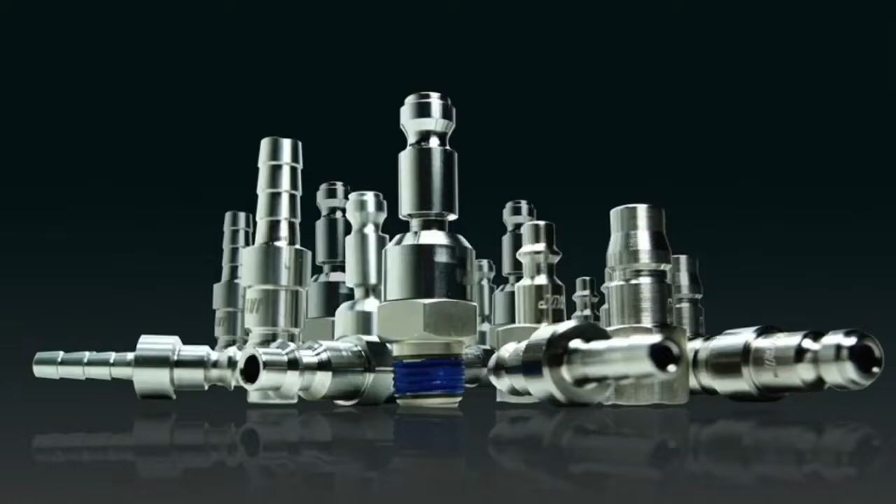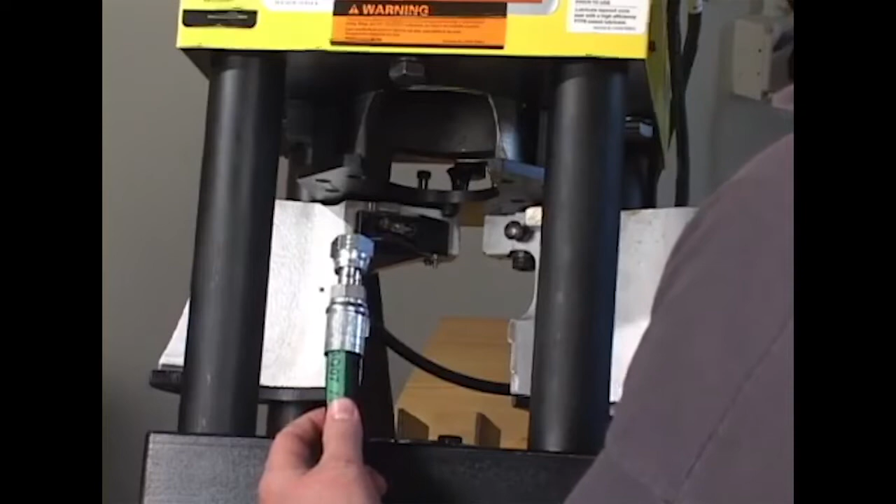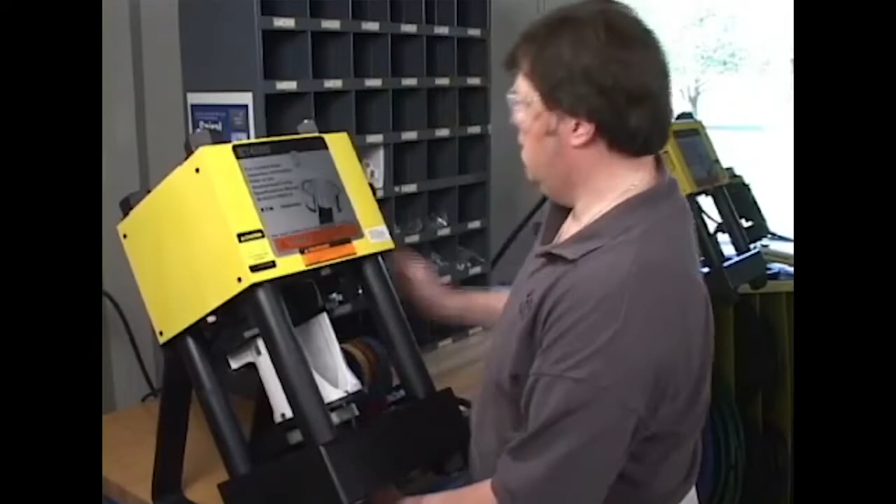Congratulations on the purchase of your new Coll-O-Crimp system, designed to assemble high-quality Eaton Weatherhead hose and hose ends. In the field or in the shop, Coll-O-Crimp systems save time, labor, and money. Eaton Weatherhead hose assemblies made with Coll-O-Crimp feature high-quality connections, ease of operation, faster assembly time, and low maintenance. You can make your own OEM quality custom hose assemblies with a Coll-O-Crimp system at a fraction of the cost.

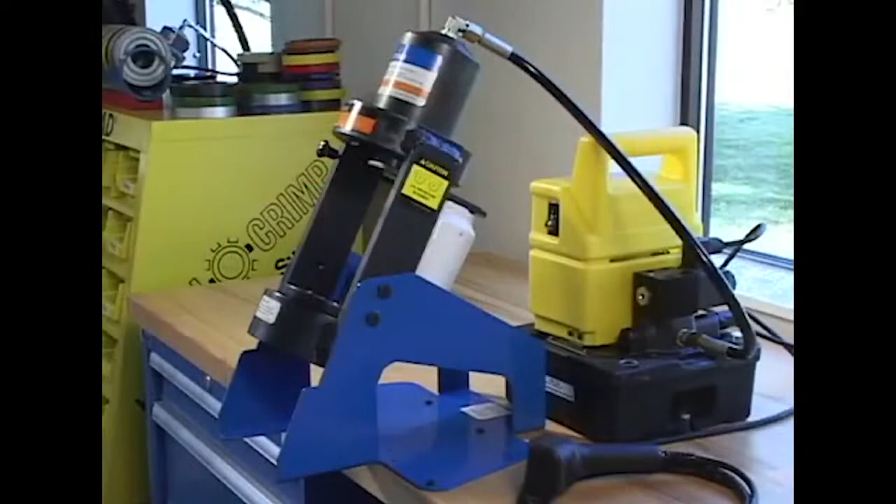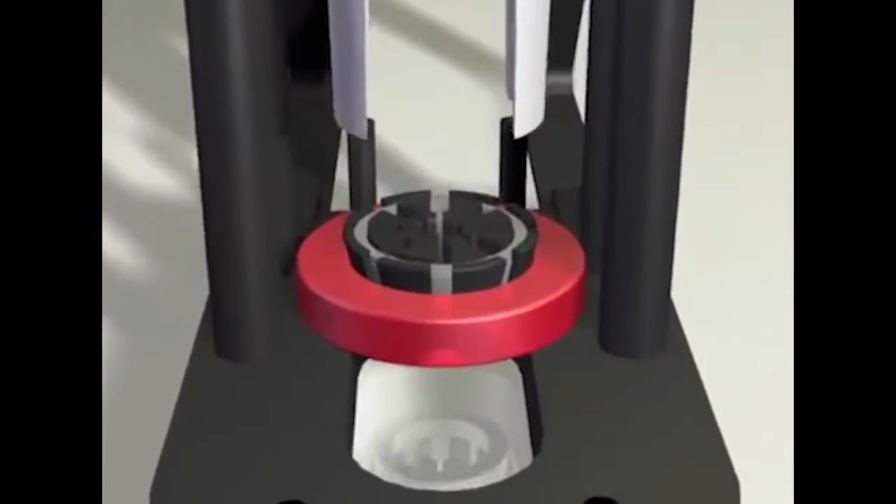There are a number of Coll-O-Crimp models, and although there are some minor differences, they are essentially similar in design and operation. There are both stationary models and portable units. Let's begin with an overview of the machines and the components they all have in common. Each machine has a base plate, a platform at the bottom of the unit that holds the die ring. On some models, the die ring is incorporated into the base plate. On other units, the die ring rests on top of the base plate.

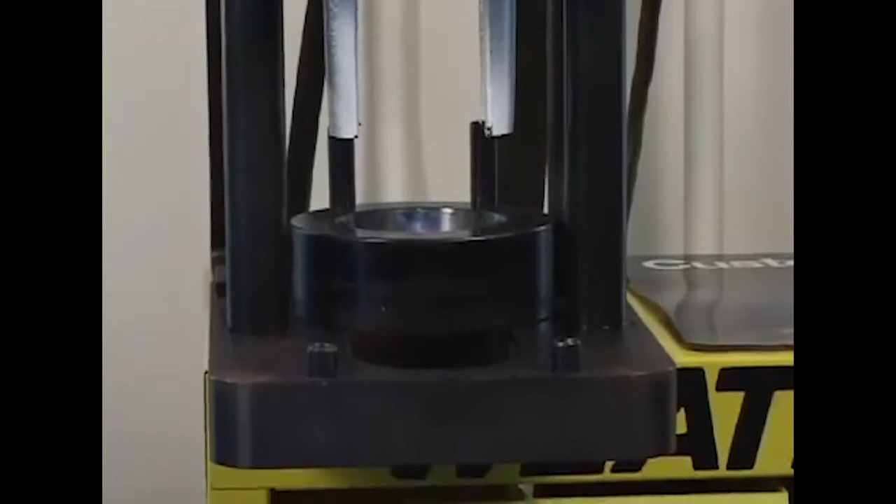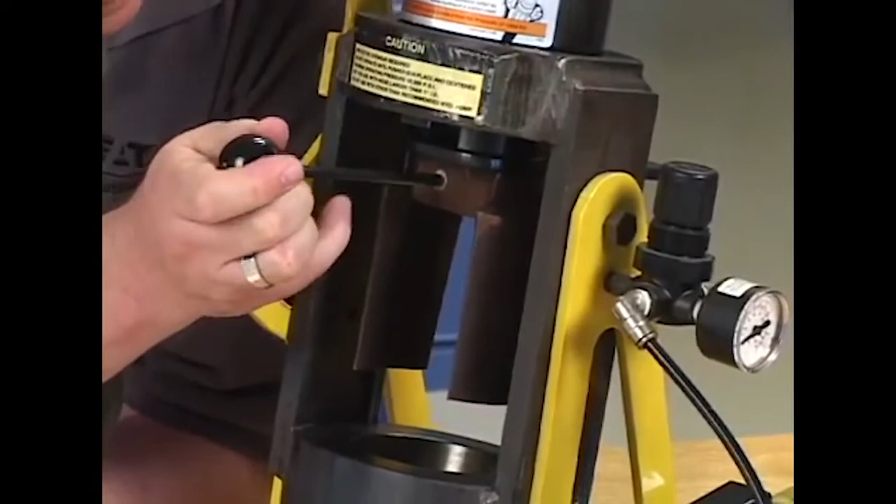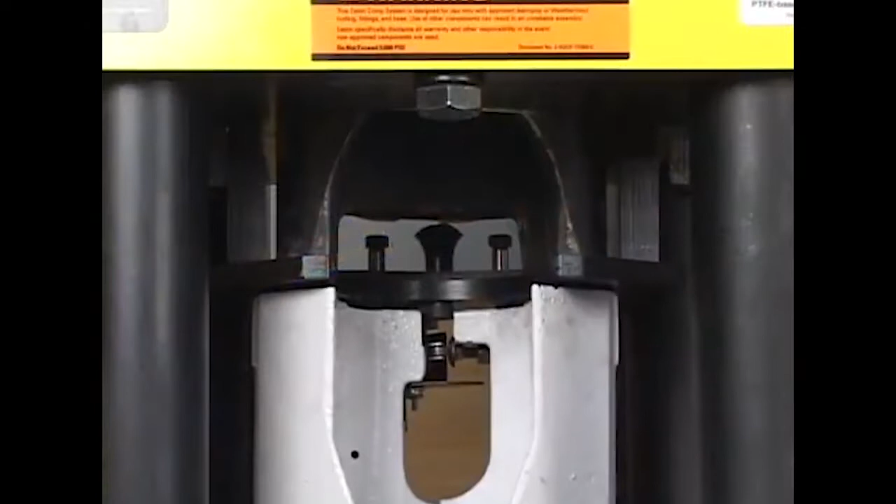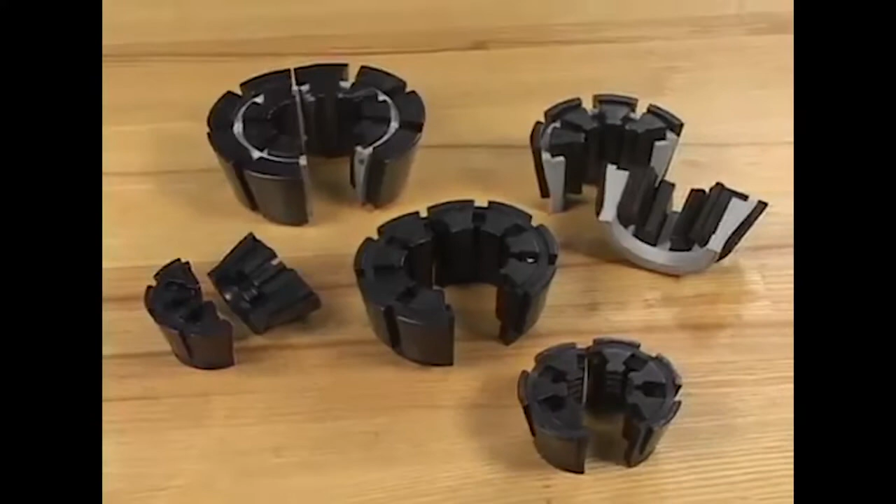Above the base plate is the pusher that is attached to the cylinder. The pusher on certain models is designed to slide for easy tooling access. Although the pushers on some models open and close and on other models are fixed, they all perform the same operation. The pusher is bolted to a piston inside the cylinder that provides the force necessary to perform the crimp. There's a series of collets that permit the crimping of a wide variety of hose types. They are inserted into the die ring and must be matched to the hose and hose end type being crimped.

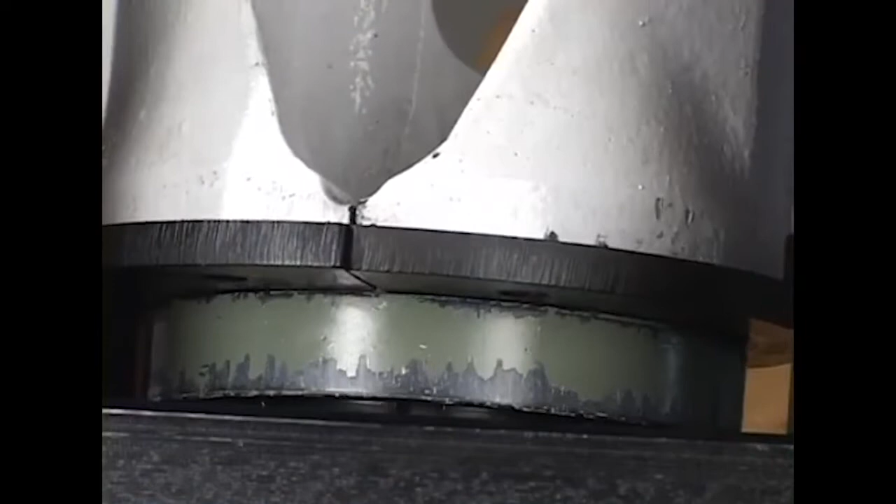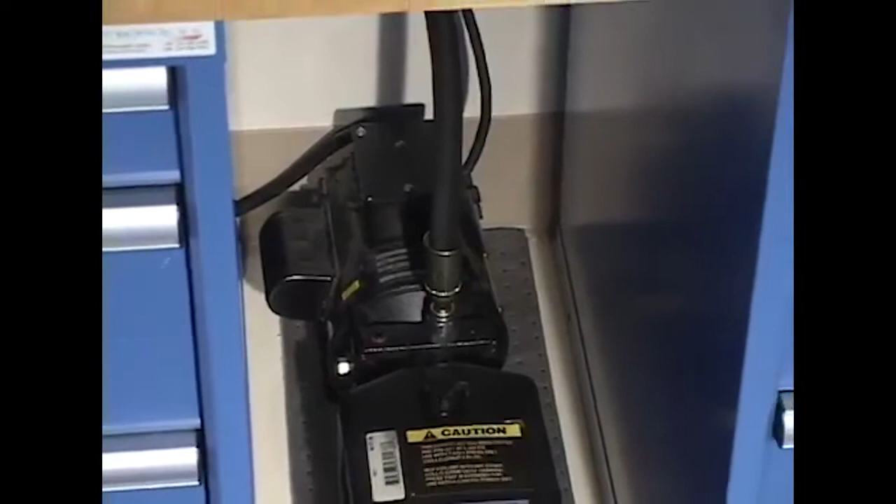All Coll-O-Crimp models provide a positive stop action that ensures a quality crimp time after time, assuming the correct tooling and hose ends have been selected for crimping Weatherhead hose and hose ends. Most stationary Coll-O-Crimp models use an electrically operated hydraulic pump that powers the press. These are single-phase 110-volt pumps that must be used with a 15-amp breaker. Optional 220-volt pumps require a 30-amp dedicated circuit and cannot be used with an extension cord.

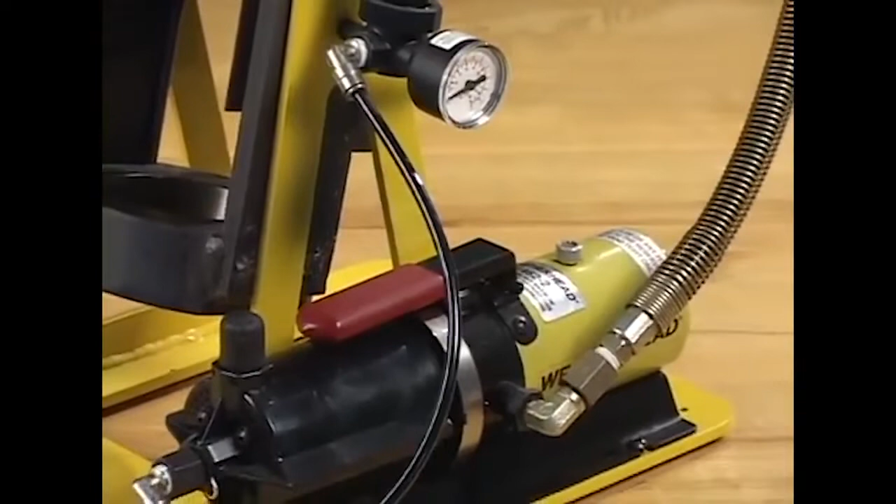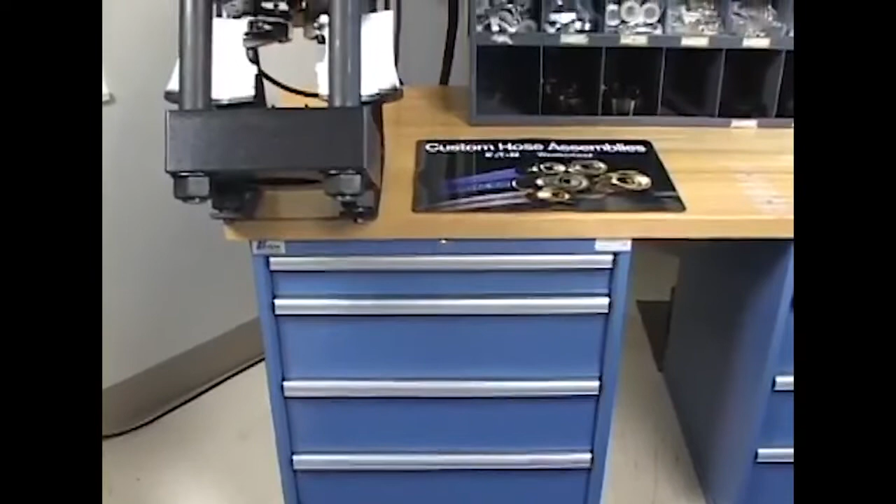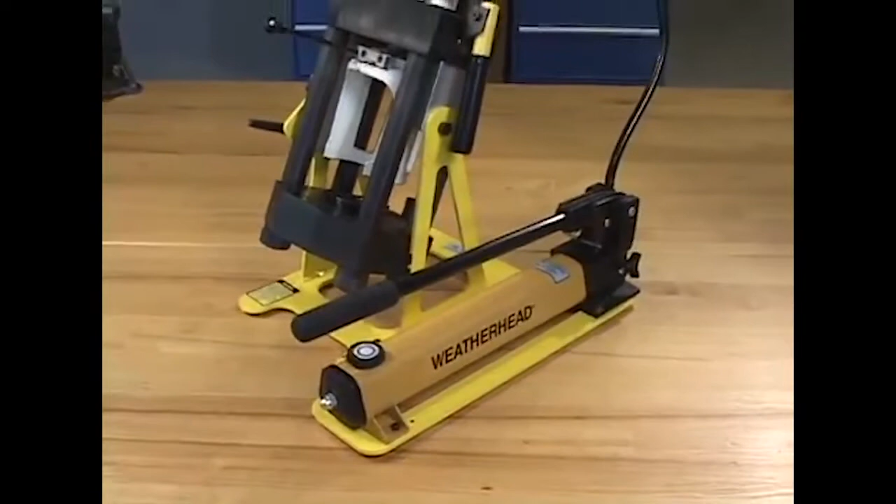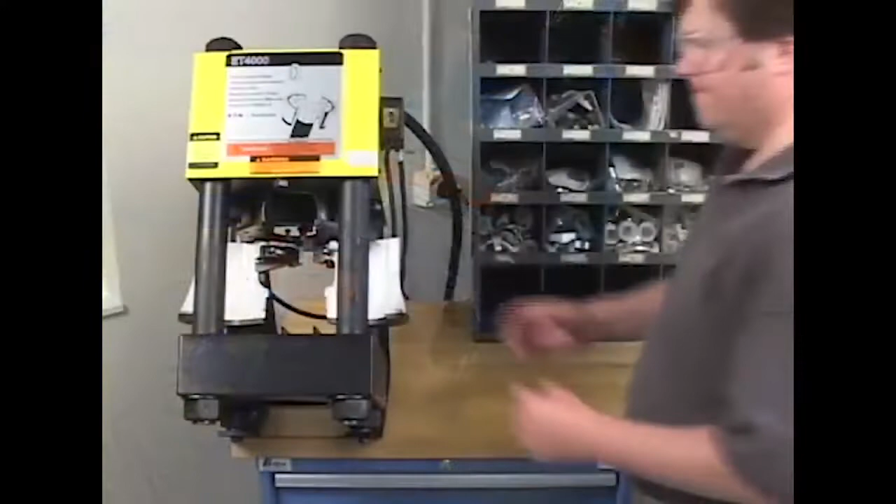Portable Coll-O-Crimp models, the Coll-O-Crimp Junior and the ET1000, also use an air-over-hydraulic pump or a hand-operated pump. The T400 Coll-O-Crimp 1, T420 Coll-O-Crimp Super 1, and the new ET4000 are designed to mount to a special cabinet that stores the tooling and a supply of hose ends. The portable models are self-supporting. There are no gauges or dials to set, and calibration is not required. The operation and design are simple, but the results are assured every time when proper procedures are followed. Whether a stationary model or a portable unit, safe and proper mounting is always a priority. Never operate any Coll-O-Crimp machine until it is properly secured.

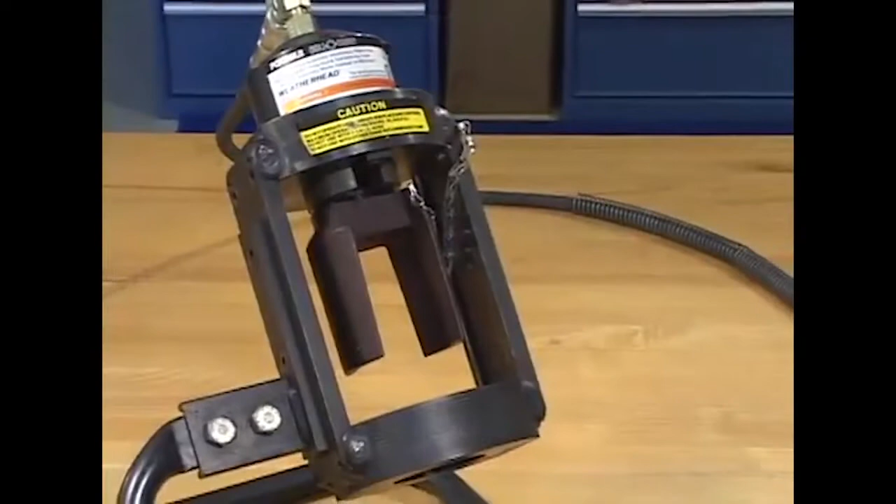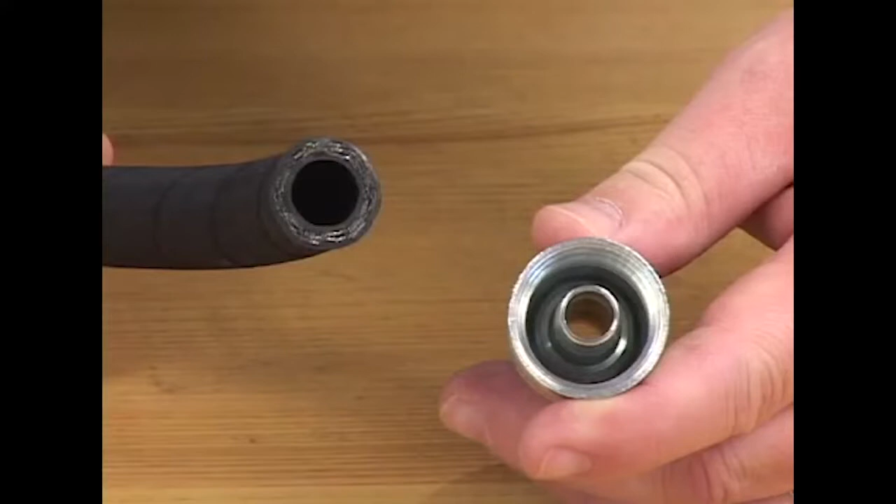What truly sets each Coll-O-Crimp model apart is its size. Not necessarily the size of the machine, but the minimum and maximum sizes of hose and hose ends which each unit will accommodate. If you're using the Coll-O-Crimp for the first time, it's important to check the inside diameter of the hose you want to assemble. Make sure your Coll-O-Crimp model has the capacity to crimp that size hose. Here's a quick review of the various Coll-O-Crimp models.

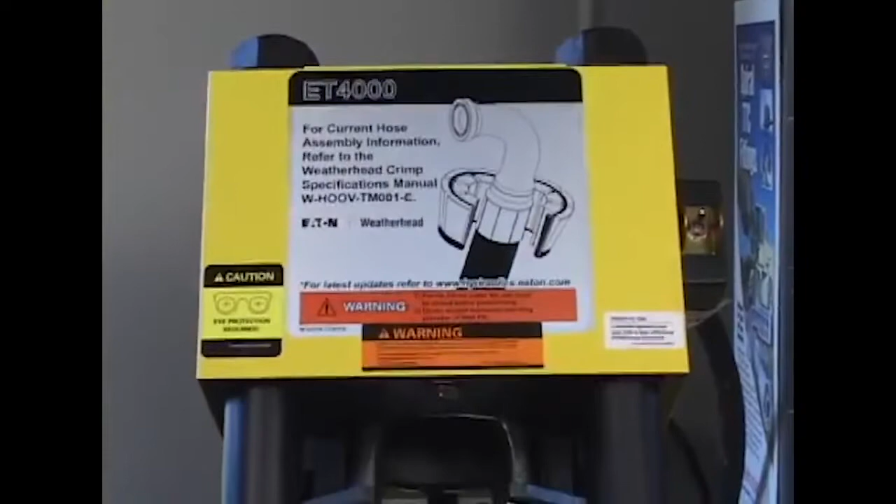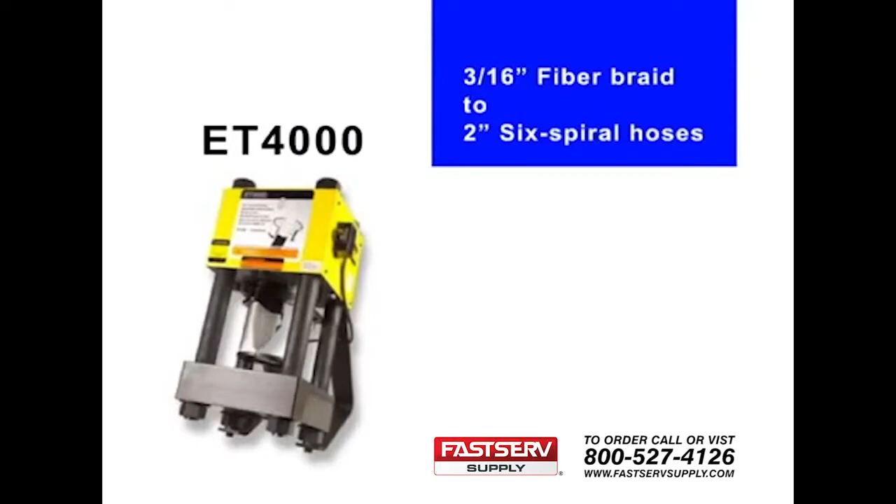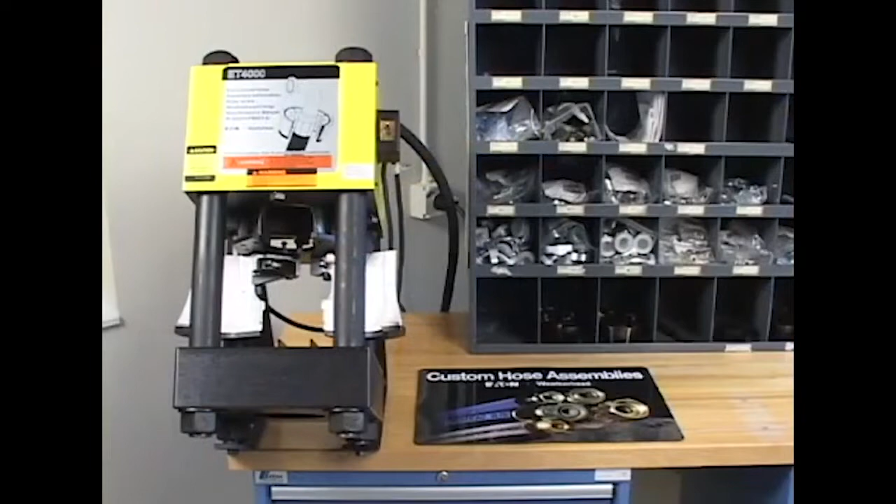The latest and most impressive model in the Coll-O-Crimp lineup is the ET4000, designed for high-performance operations with capacities from 3/16-inch fiber braid through 2-inch 6-spiral hoses. The ET4000 is bench-mounted and it's capable of handling all your crimping needs. Because of its weight, this model requires special handling and mounting. Consult the manual for specific instructions and follow the directions carefully.

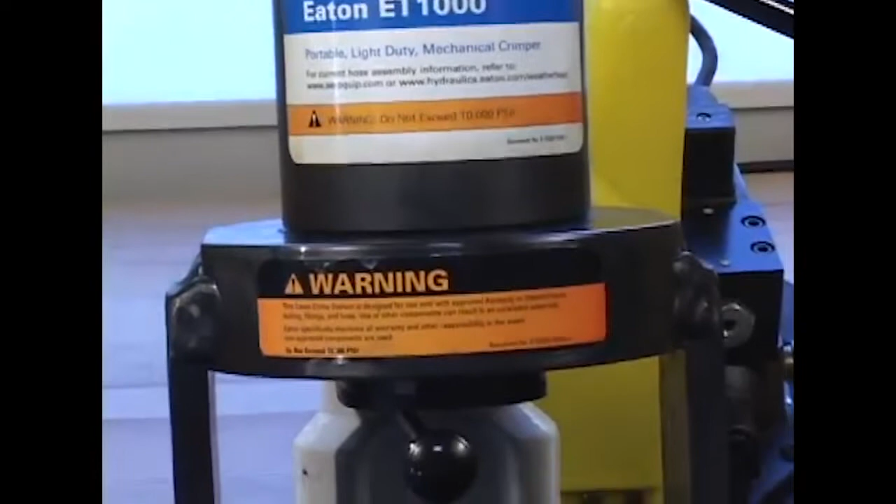The newer mid-size ET1000 is one of the most versatile machines, able to crimp a wide range of hose sizes and a number of power source options. It crimps U-Series hoses in sizes 1/4 inch through 1 1/4 inch, Z-Series hoses with the same dimensions, and 430U hose series from 3/8 inch through 3/4 inch.

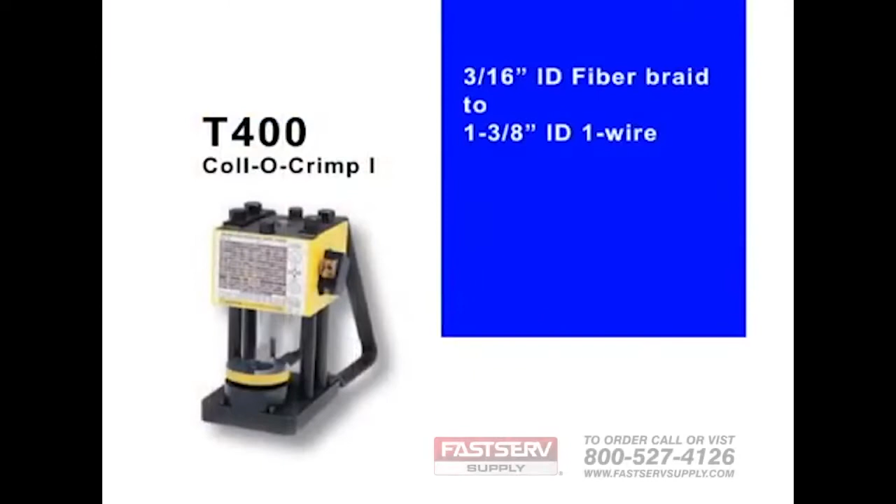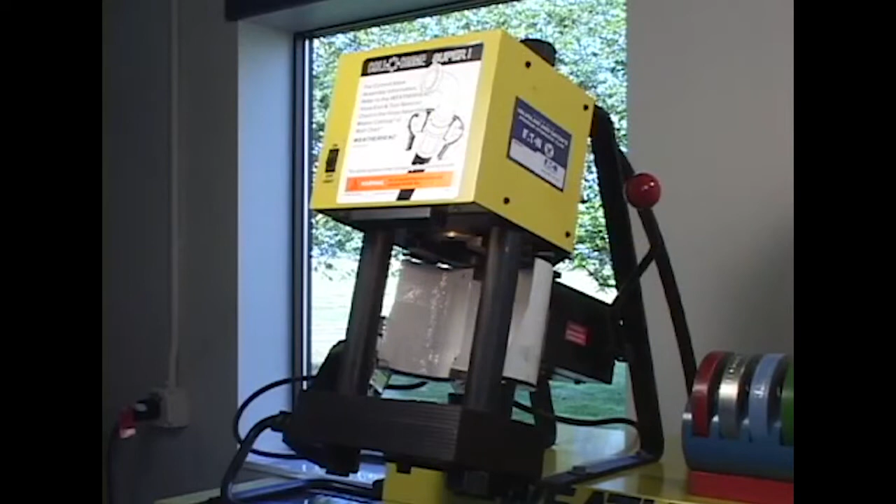The T400 Coll-O-Crimp 1 offers crimping capabilities ranging from 3/16 inch ID fiber braid through 1 3/8 inch ID 1-wire hose and 1 1/4 inch ID 2-wire hose. The T400 cannot crimp 4 and 6 spiral hoses. The T420 Coll-O-Crimp Super 1 offers crimping capabilities ranging from 3/16 inch ID fiber braid through 1 1/4 inch 6-spiral hose. For 4 and 6 spiral hoses, conversion tooling is required. See the Eaton Weatherhead Master Catalog for details.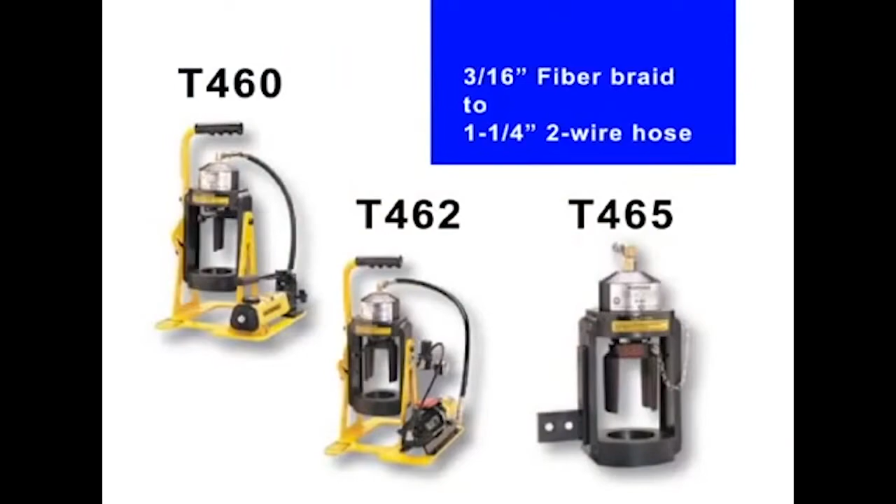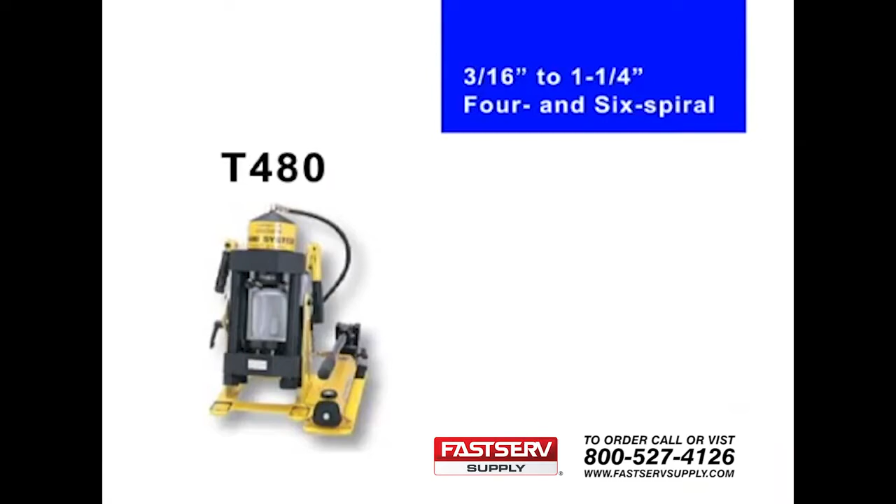The portable models, the T460, T462, and the T465, are identical except for the type of power source. All are engineered to crimp 3/16 inch fiber braid hose through 1 1/4 inch 2-wire hose. The T480 incorporates the size features of the T420 Coll-O-Crimp Super 1 in a portable unit, capable of crimping hoses from 3/16 inch to 1 1/4 inch 4 and 6 spiral.

All Coll-O-Crimp models, when properly set up and operated, produce quality Weatherhead hose assemblies quickly and easily. In addition to the actual Coll-O-Crimp machines, Weatherhead offers a line of optional equipment, including a wide range of pumps, hose cutters, shop press tooling kits, and specialty saws.

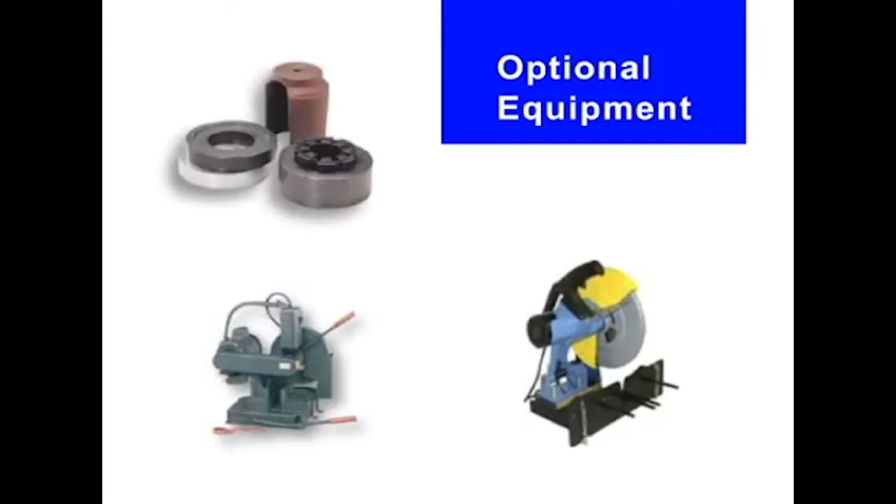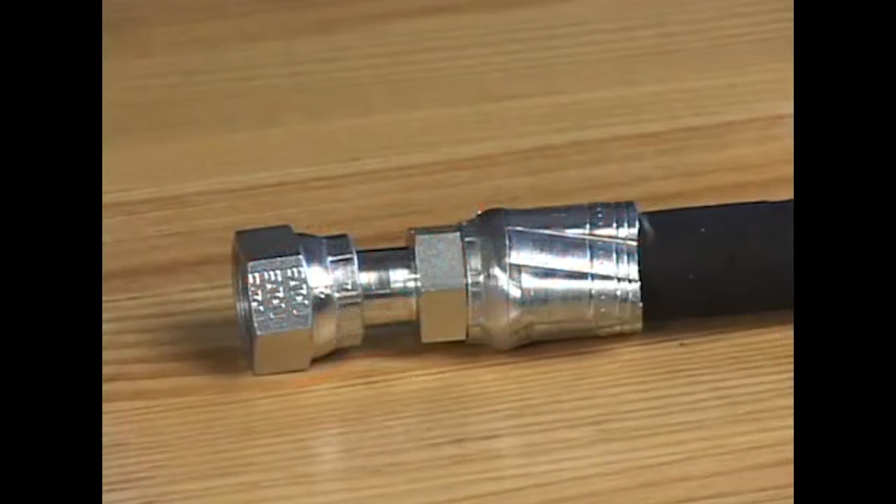Coll-O-Crimp is a proprietary design to be used exclusively with Eaton Weatherhead hose and hose ends. The use of any components other than Eaton Weatherhead will void the Coll-O-Crimp warranty and may result in the production of an unsafe and unreliable hose assembly. Before you attempt to operate your new Coll-O-Crimp machine, please view this entire video and read the setup and operating instructions booklet that was included with your particular system.

It's imperative that you read the important safety information located in the front of the Eaton Weatherhead Hose Assembly Master Catalog. Also, pay special attention to these important safety guidelines. Always wear safety glasses. Be aware of loose-fitting clothing that can get caught in the equipment. And avoid wearing any jewelry when operating the machine.

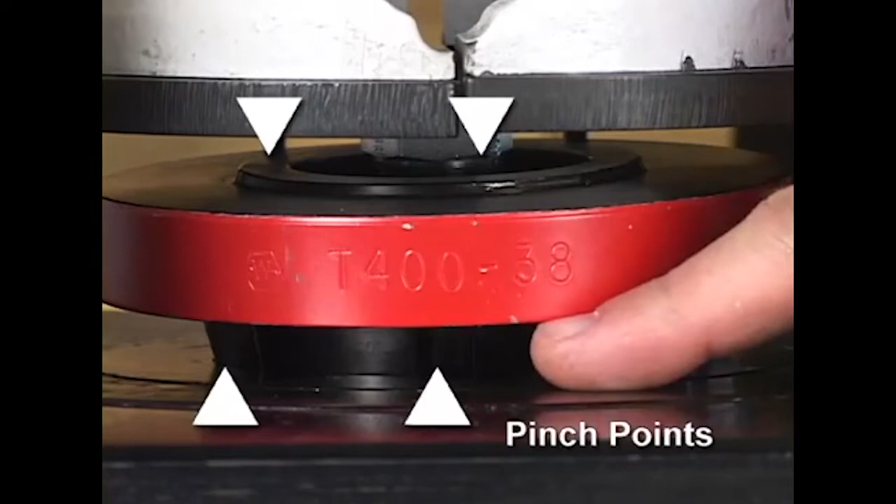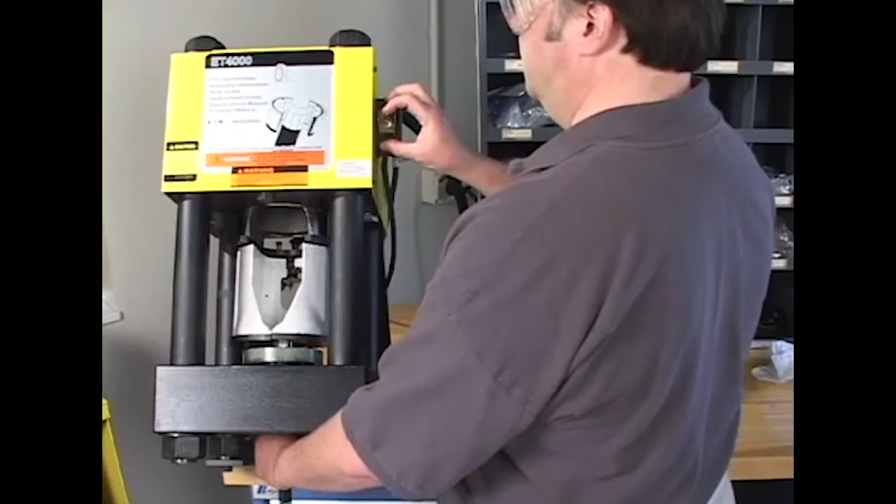All machines have certain pinch points, particularly the press, the pusher, and of course the collets where the actual crimp is performed. Keep one hand on the hose being crimped and one hand on the handle or the toggle switch away from these pinch points. Now, before we make an actual hose assembly, let's review some basic procedures and offer some Coll-O-Crimp tips.

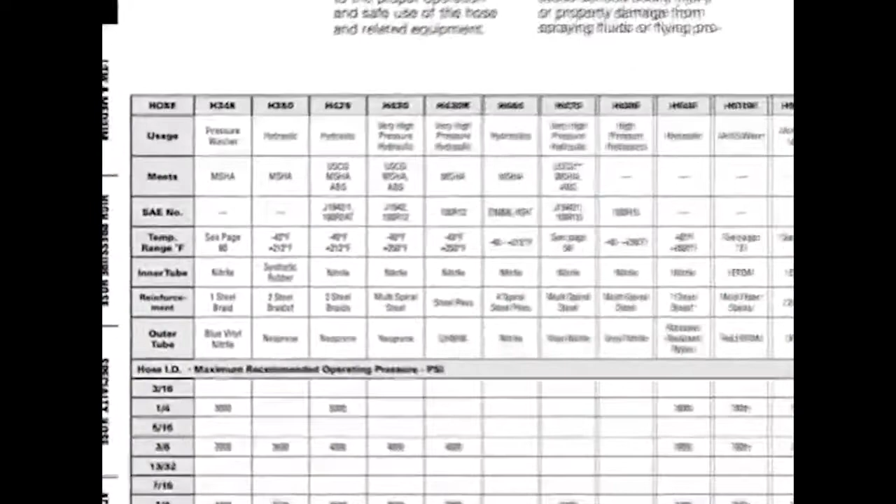Start with the proper hose and hose end selection. Refer to the Eaton Weatherhead Crimp Specifications Manual. Be sure that the hose and hose ends you select meet the specifications for the end use. In other words, are these components designed and approved for the type of application for which the hose assembly is being used? Always refer to the Eaton Weatherhead Hose Assembly Master Catalog for the proper Eaton Weatherhead series of hoses and hose ends. Please follow these basic steps, even if you have used Coll-O-Crimp equipment before.

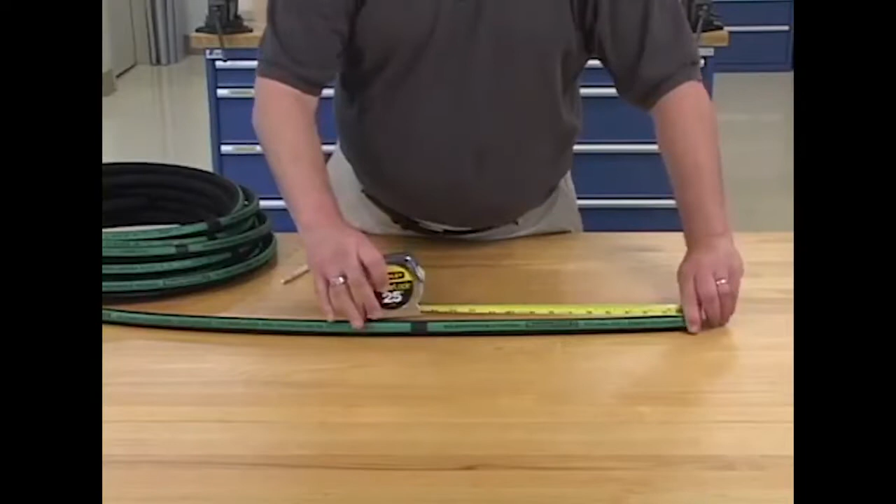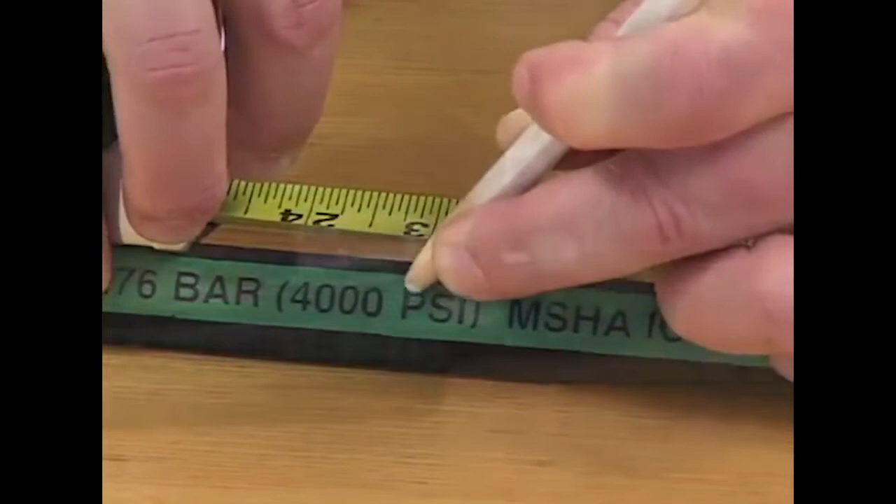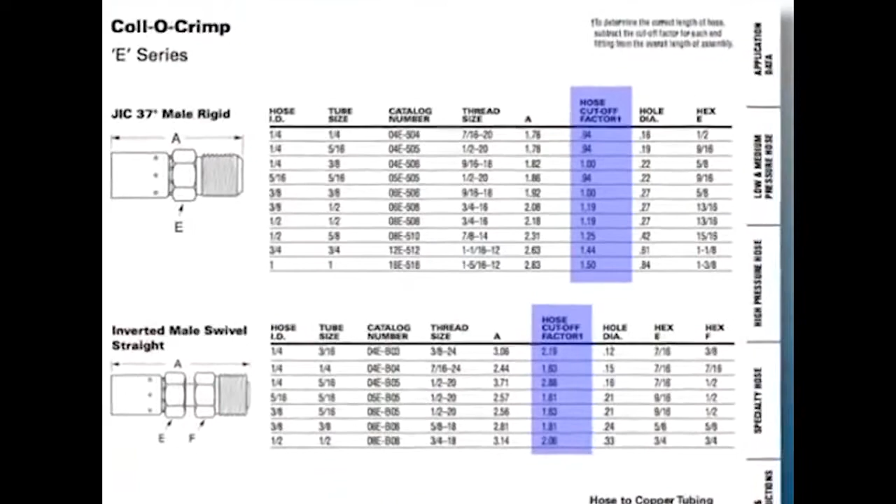The first step is measuring and then cutting the hose to the proper length. If you are not familiar with making hose assemblies, follow all the standard recommended safety procedures for hose cutting. Be sure you allow for what is called the cutoff factor. Remember, the overall length of the hose includes the hose ends, and you must allow for this additional length before cutting the hose. The cutoff factors for hose ends are found in the Eaton Weatherhead Master Hose Assembly Catalog. Be sure the cut is both square and clean.

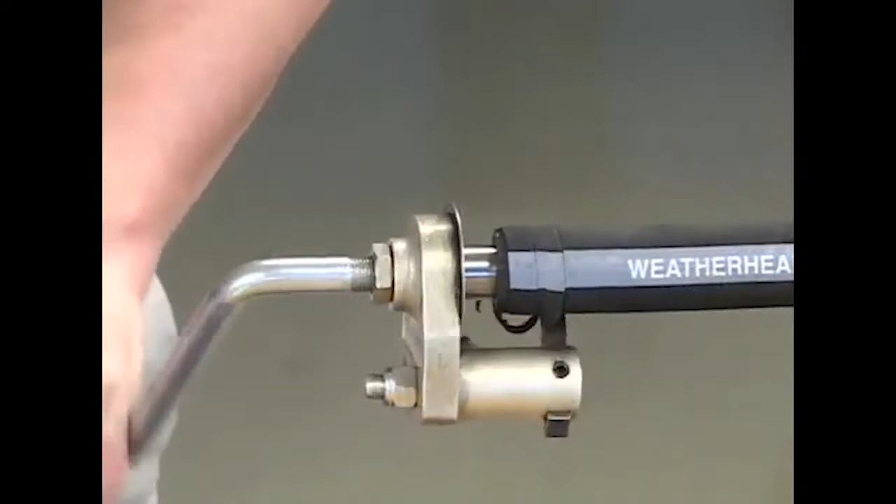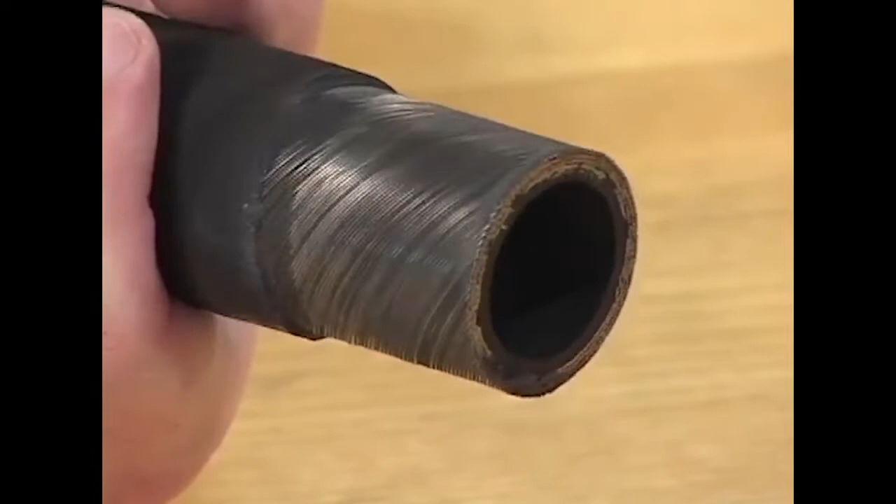Some hose ends require the hose to be skived before assembling. This involves the removal of the outer hose cover at both ends. Instructions for proper skiving are found in the Eaton Weatherhead Master Hose Assembly Catalog. A good skive looks like this, with the cover completely removed, yet the wire wrap is not damaged or disturbed in any way. Refer to the Eaton Weatherhead Crimp Specifications Manual to determine if an Eaton Weatherhead hose must be skived.

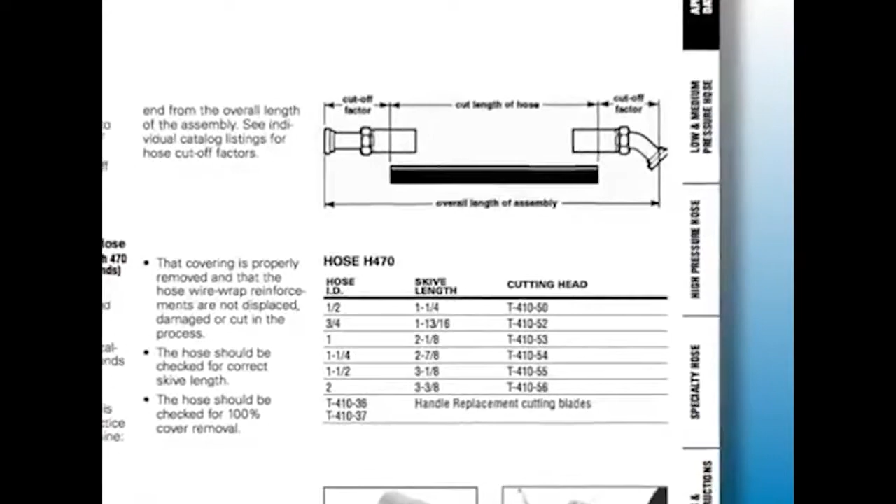Now we're ready to actually assemble the hose and hose end using the Coll-O-Crimp machine. After the proper hose and hose ends have been selected, to ensure that the hose end will be fully inserted, mark the hose from the end to a length equal to the collar depth. Now insert the hose into the hose end up to that mark. Be sure that the end of the hose has bottomed out in the collar and has been inserted all the way. This is necessary to ensure a proper crimp.

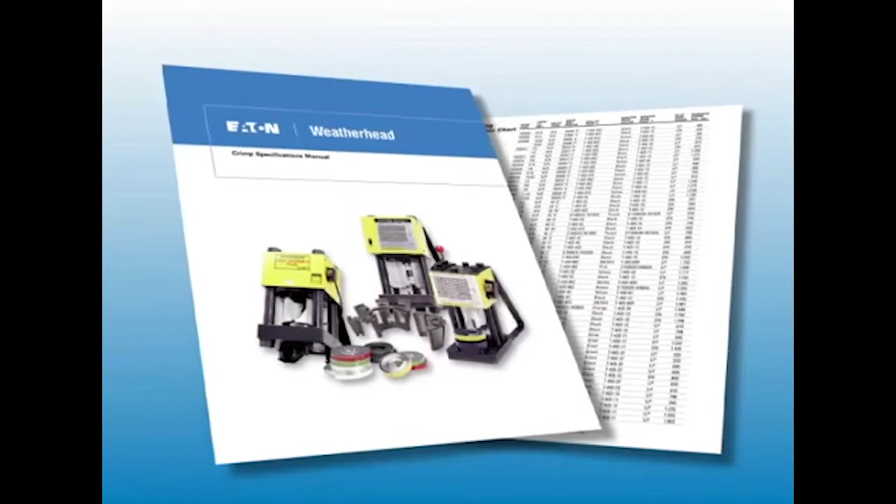Next, refer to the Crimp Specifications Manual for the correct collets, spacer ring, and spacer ring position. Some hose types do not require the use of a spacer ring. Collet part numbers are stamped on the top of each collet half. Spacer rings are color-coded, and they are also stamped with a part number for easy identification.

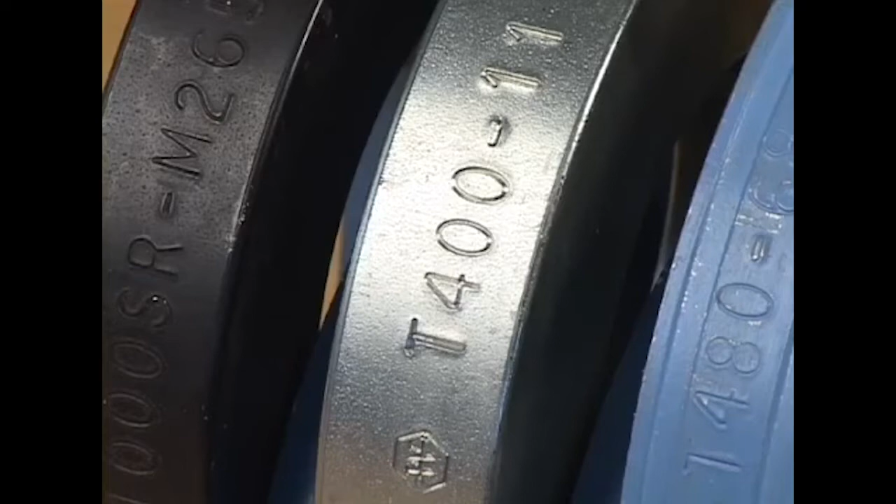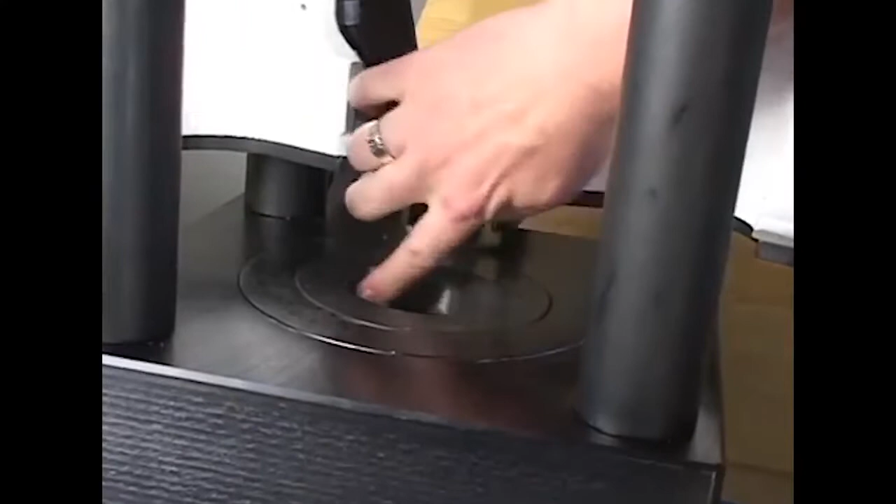The proper Weatherhead tooling must be selected for each model of press. Now, select the collet and spacer ring, if used, for this particular hose. For the first time and periodically thereafter, lubricate the taper of the die ring or the base plate with Eaton Weatherhead's T400G grease.

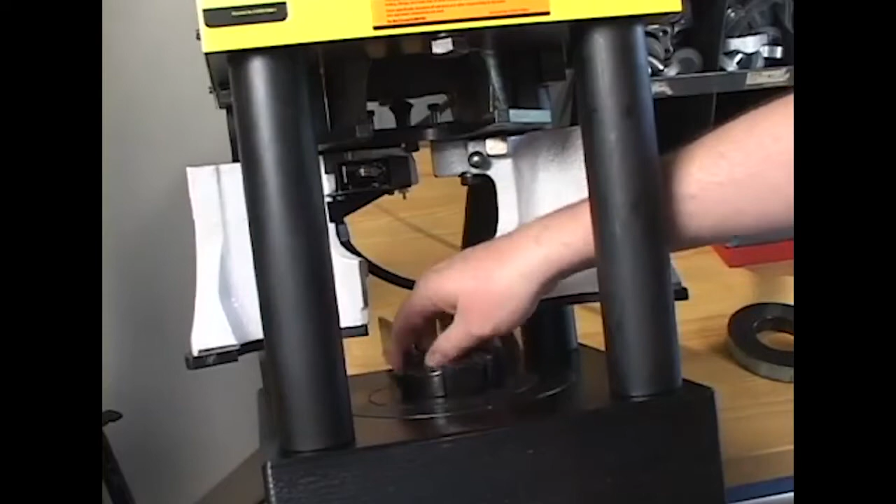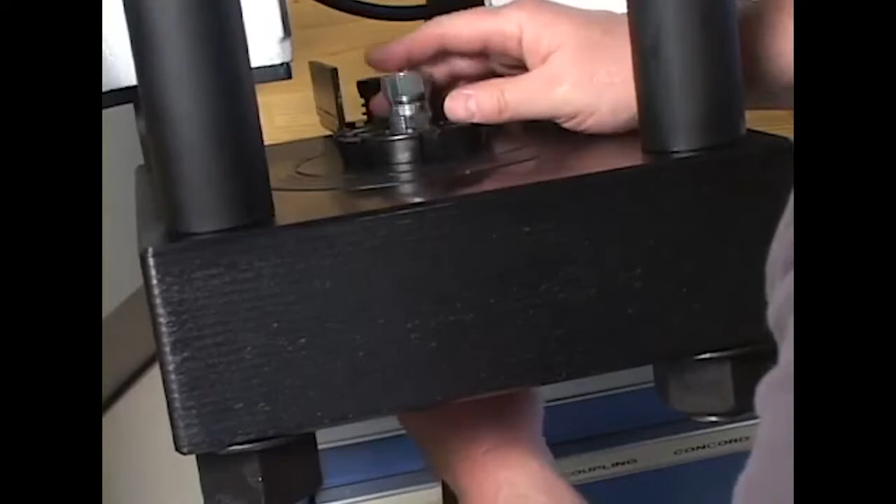Open the pusher doors, if movable, and insert the collet in the die ring. If the die ring's set on top of the base plate, slide the die ring forward so that it is accessible. Insert the hose end of the assembly from the bottom through the collet so that the fitting end is protruding from the top of the collet. On portable models, push on the slide rod to move the pusher back, or remove it from the retainer plate so that the tooling can be inserted.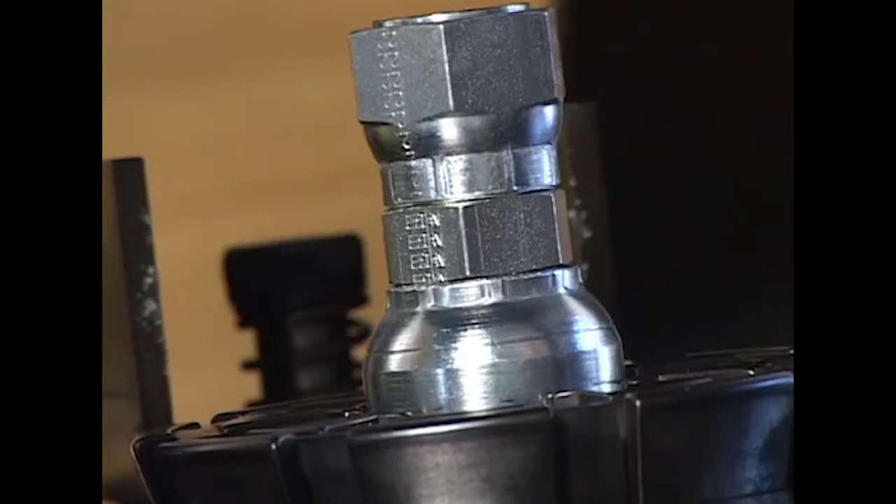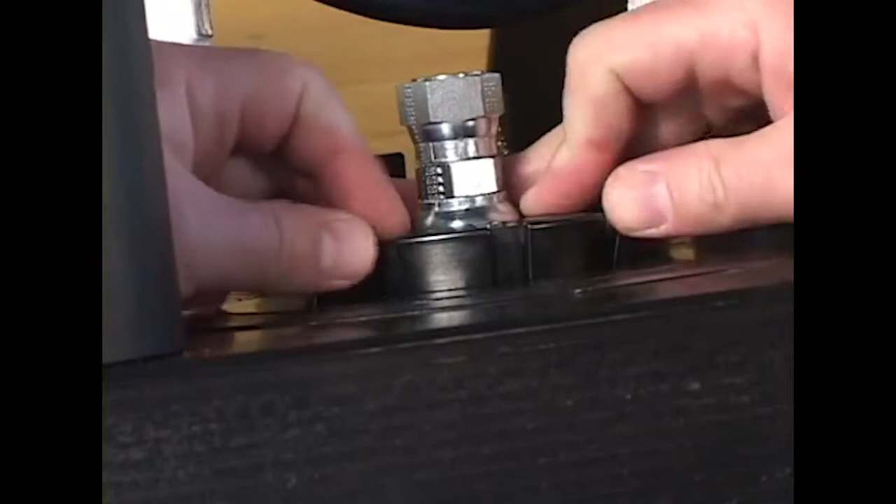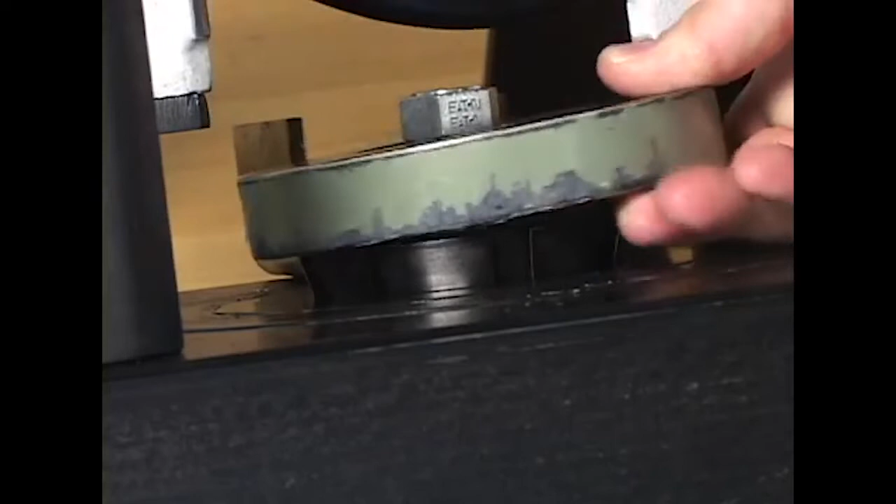This next step is very important. Align the top of the dimples, scribe line, or knurled band on the hose end with the top of the collet. Now, be sure the collets are properly seated in the die ring and are level with one another to ensure a good crimp. If a spacer ring is used, refer to the crimp specifications manual and position the spacer ring on top of the collet with the proper side up while holding the uncrimped hose in place.

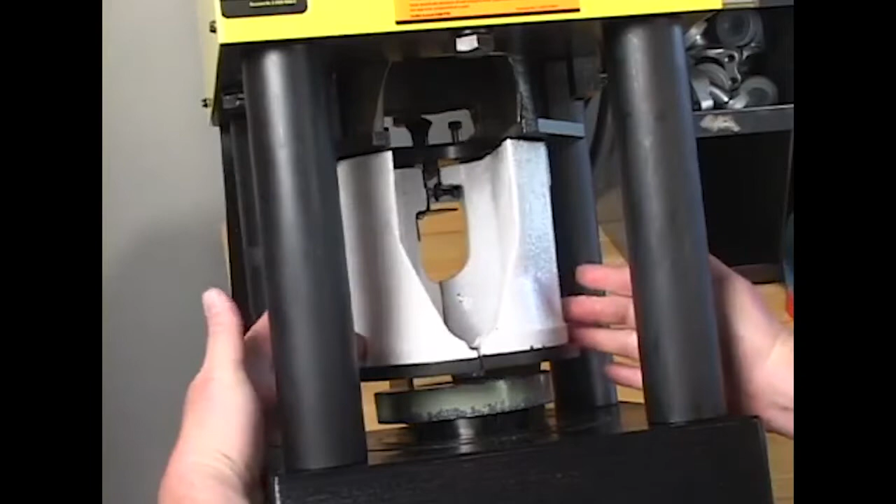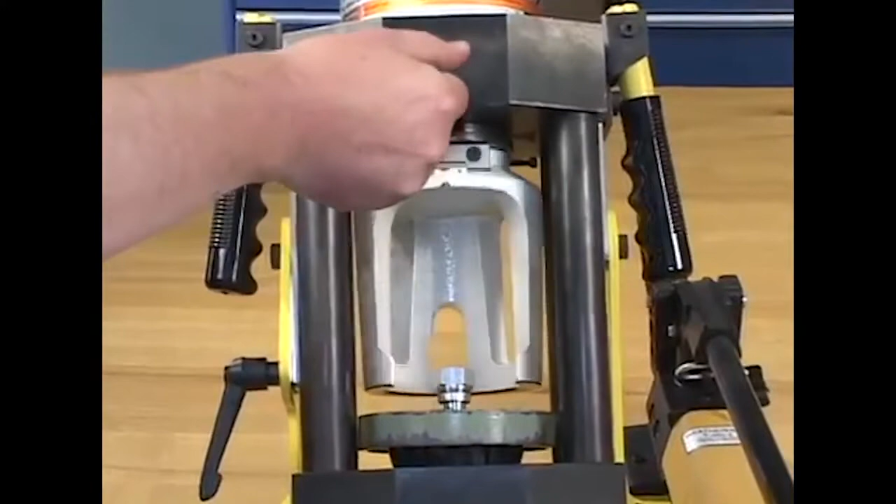On the T440 and the ET4000, close the pusher halves by hand. On the T420, move the lever on the right side of the machine to close the pushers. When this handle is pulled down further, it activates the pump. On all other Coll-O-Crimp models, the pusher halves are fixed and need to be pulled forward or placed back on the retainer plate before activating the pump.

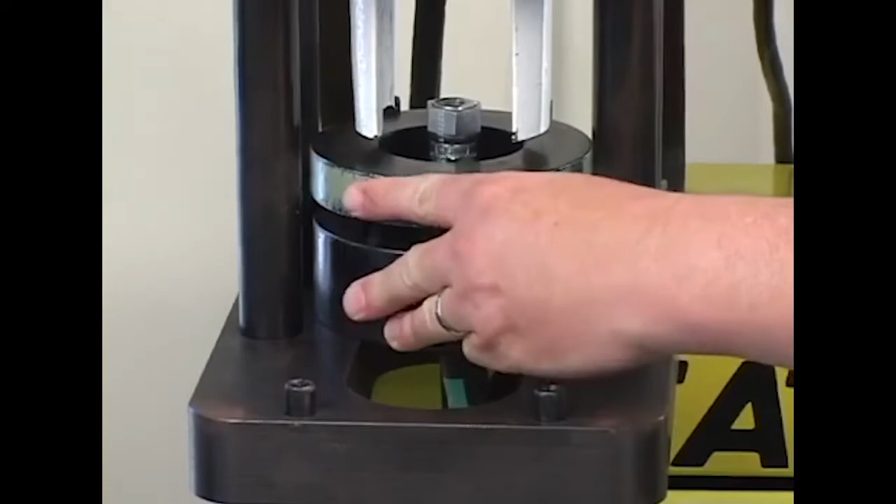If the die ring sets on the base plate and has been pulled forward, push it back against the alignment pins. To help avoid injury, remember to keep one hand on the hose assembly being crimped and one hand on the activating switch or lever. Now, activate the pump. The actual method differs with the model of Coll-O-Crimp. The T420 uses the handle that closes the pusher halves. Other models use a toggle switch.

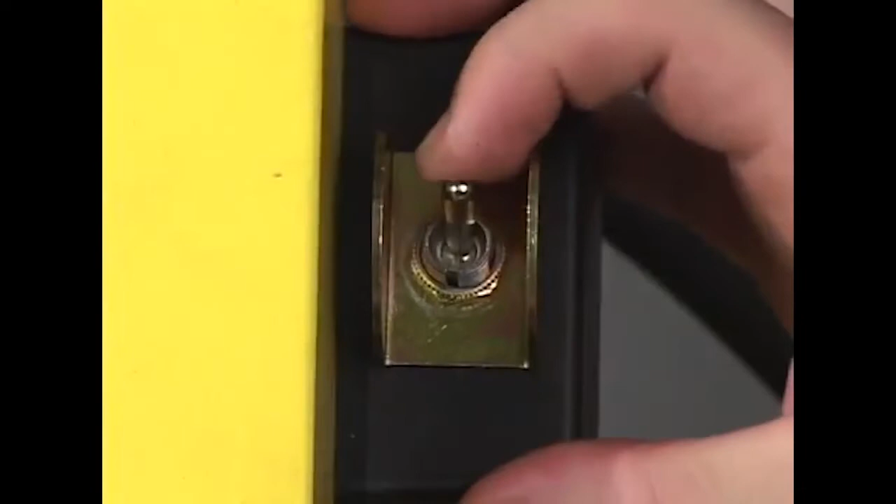The portable models, T460, T462, T465, and T480, generally use the hand pump with a control valve. The T480 is also available with the air-over hydraulic turbo or 110-volt electric pump. Watch for the spacer ring and die ring or the pusher and die ring to make contact, which indicates that the crimp is complete. At this time, release the pump switch handle or control valve, allowing the pusher to retract.

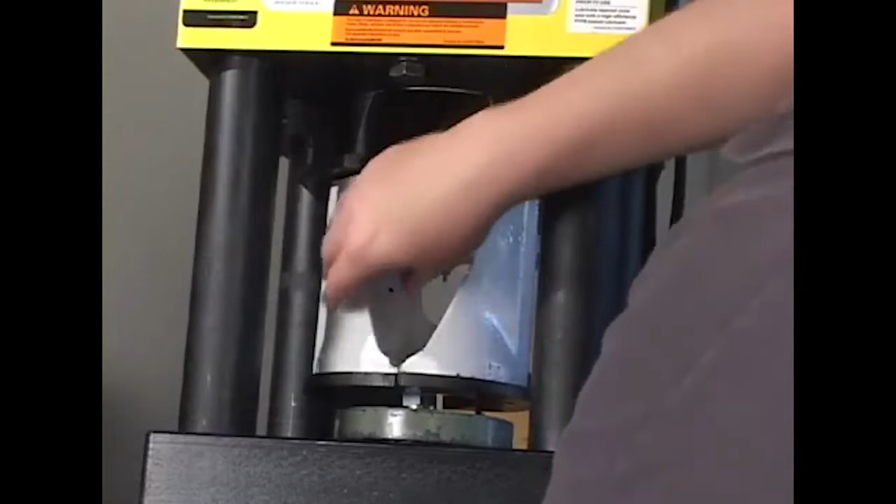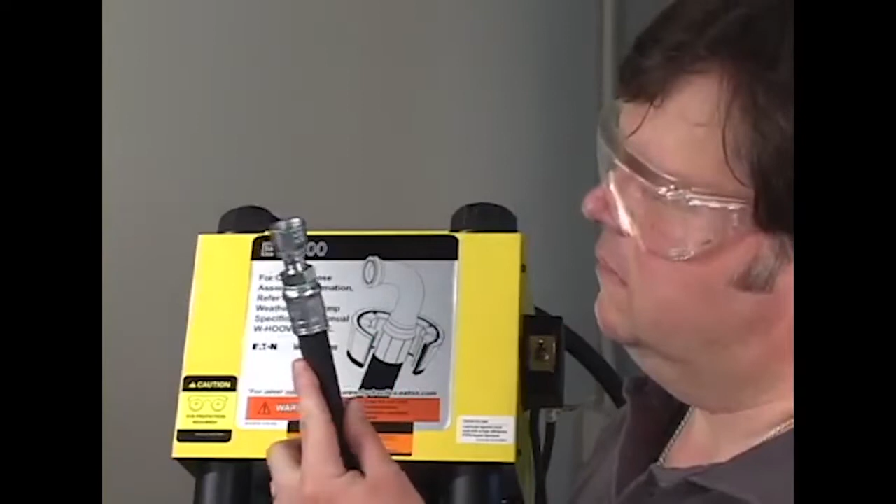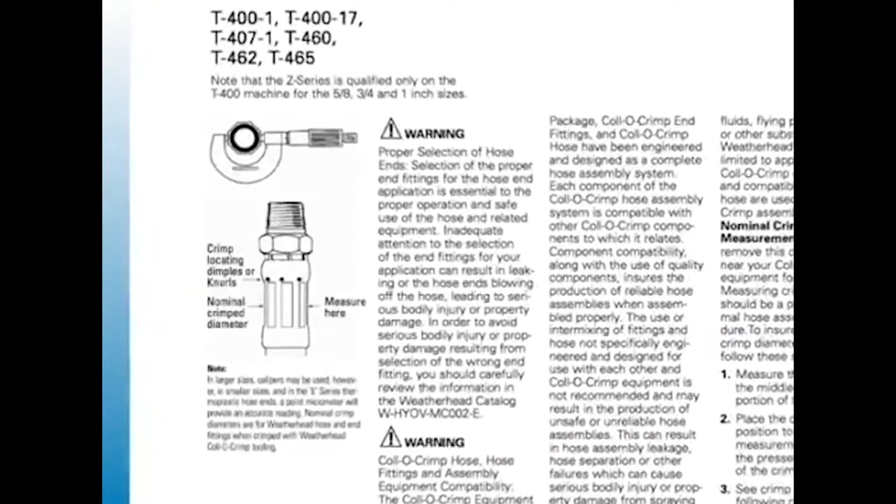Move the pusher or open the pusher halves if the machine is so designed, and remove the tooling and hose assembly. Visually inspect the crimp. Be sure that the crimp is located within 1/16 inch either above or below the crimp location mark. The one exception is for Z-series fittings, which require a crimp location within 1/32 of an inch of the crimp location mark. If there is any deviation in this tolerance, do not use the hose assembly.

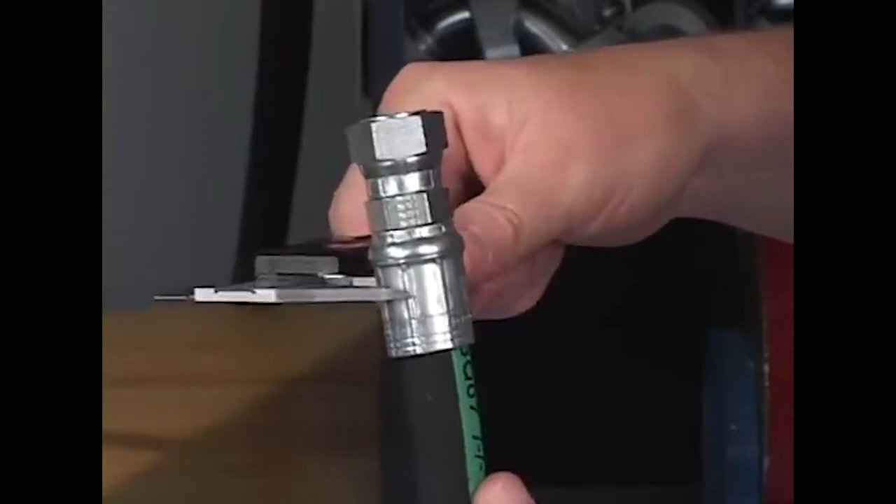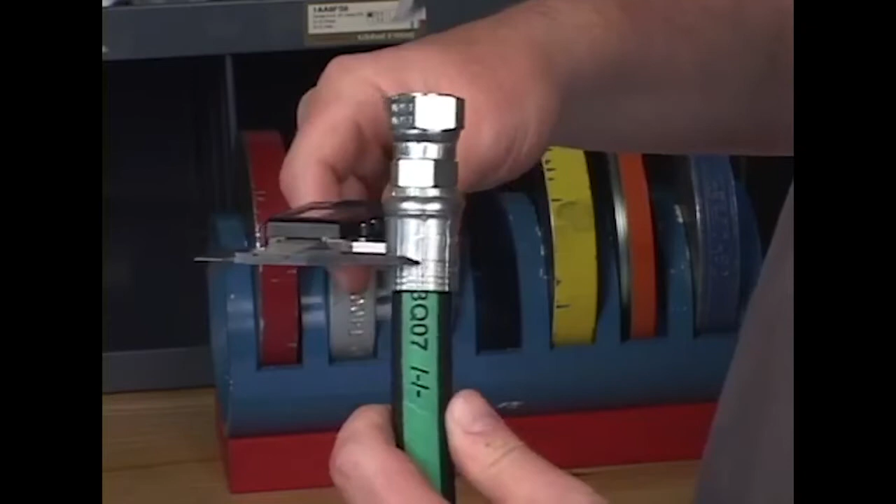Check the nominal crimp diameter using calipers or a point micrometer and compare the reading to the specification listed in the crimp specification manual. You should measure all 4 sets of flats and average your readings to obtain the nominal crimp diameter. Crimp tolerance is plus or minus 6/1000 of an inch. Again, if there is any deviation in this tolerance, do not use the hose assembly. Be sure to measure in the middle of the crimped portion and only the flat surfaces of the crimped area.

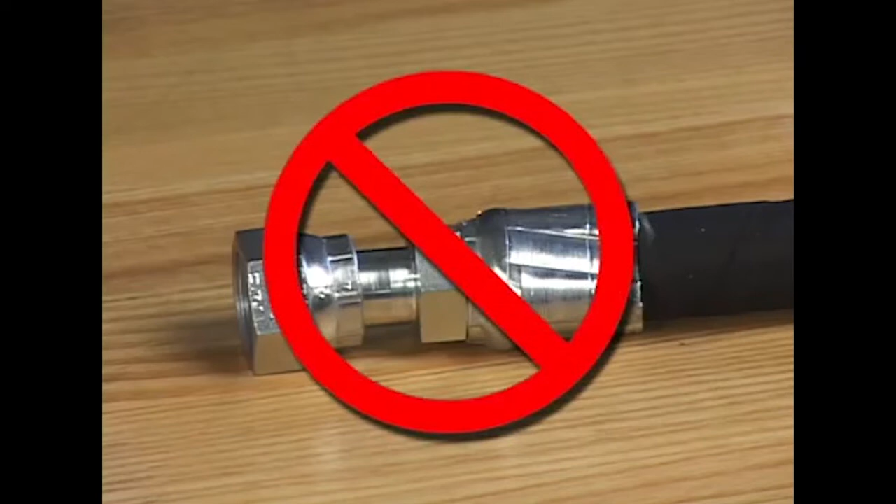If an improper crimp is detected, double check to be sure you are using the correct hose, hose ends, and collets, and that the spacer ring, if required, was positioned properly. If the crimp is not to specifications, use a new Weatherhead hose end to make a new assembly. Never reuse a hose end once it has been crimped. You will also need a new length of hose if the previous one was damaged or if it is too short for the application.

This assembly procedure may now be repeated for the other hose end, following the identical steps. If there is a problem or you have any questions, consult the crimping procedures found in the equipment section of the Eaton Weatherhead Master Catalog. Refer to the helpline telephone number located on this video box or contact your Weatherhead supplier or representative.

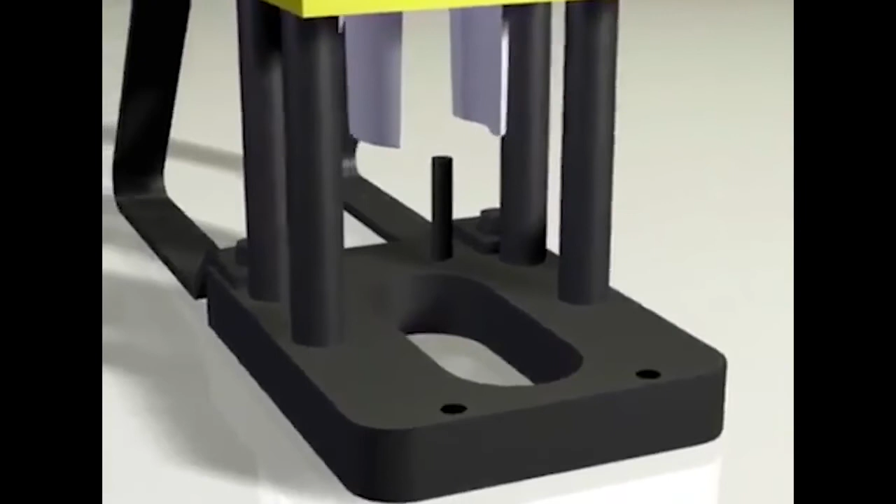One final reminder, safety should never be compromised under any circumstances. Be sure the unit is properly positioned before using, and follow all the normal safety procedures when the machine is being operated. By following the proper setup and operating instructions, you can make dependable Eaton Weatherhead hose assemblies every time using the Coll-O-Crimp system. Crimp with confidence.